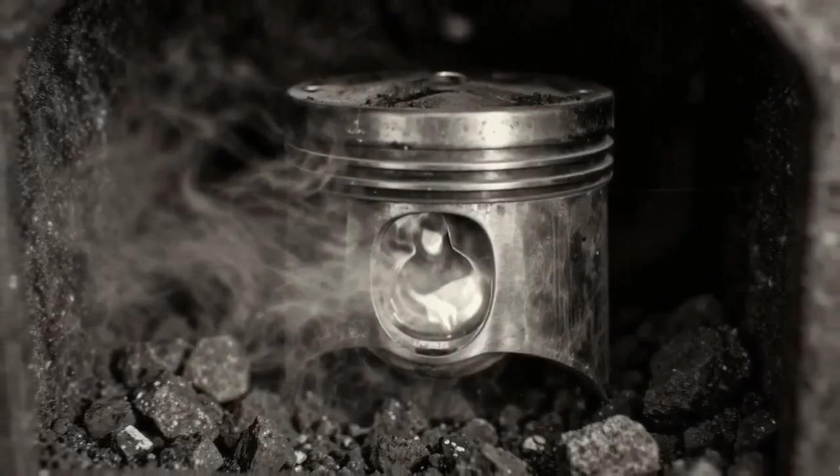Somewhere in the patent archives of the 19th century, there is a description of an engine that lit itself without a single open flame. No match, no spark, no pilot light in any conventional sense. Just a slender coil of platinum heated to a quiet, ghostly incandescence, enough to ignite a charge of vapor and air and set a piston moving.

The men who examined this machine in 1846 would have called it remarkable. Today, most people have never heard of it at all. The inventor was a New Yorker named Stuart Perry. On October 7th, 1846, the United States Patent Office granted him patent number 4800 for what the official record described

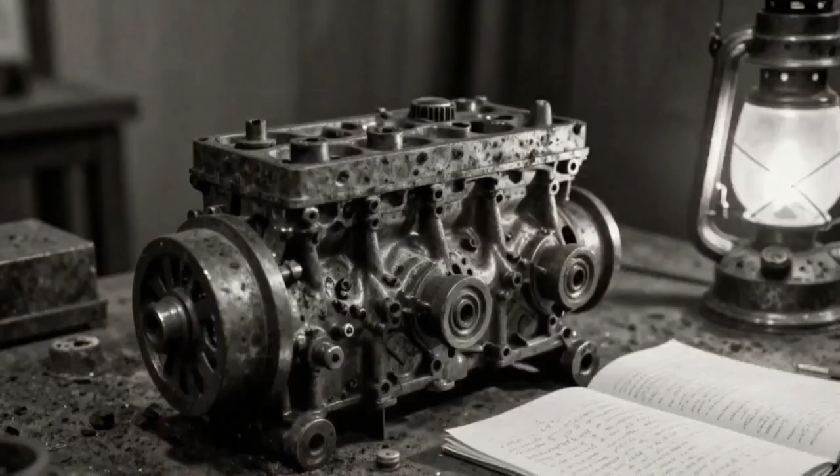as an improvement in gas engines. The language of the patent is measured and technical, the kind of careful prose that engineers of that era used when they wanted their ideas protected without being so specific that a competitor could simply read around them. But beneath the formal wording, what Perry had designed was genuinely unusual.

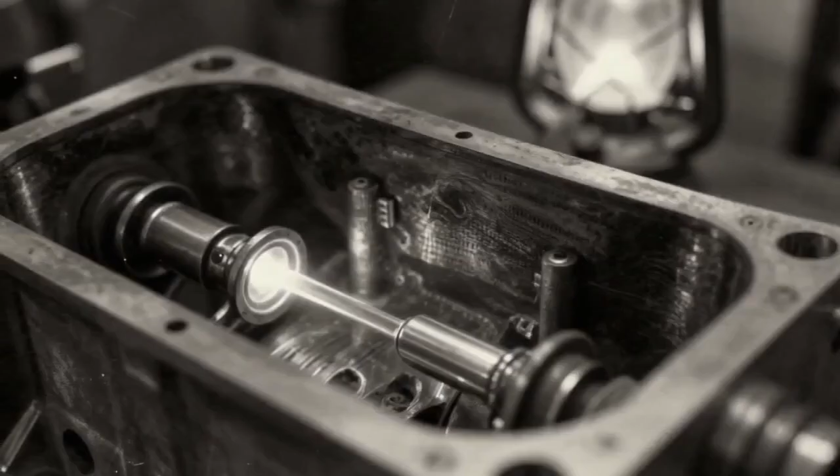A water-jacketed, double-acting horizontal engine that used vaporized fuel, mixed it with atmospheric air, and touched it off not with a naked flame, but with a piece of platinum brought to incandescence by heat alone. The result was a faint, controlled glow rather than a burning wick or an open burner, and it was enough.

It is worth pausing here to be precise about a phrase, because precision matters when the historical record is thin. The term cold light, which lends this story part of its strangeness, does not appear in Perry's original patent text. It is a modern interpretive label drawn from the scientific literature of the period that surrounded him.

Natural philosophers and early chemists in the 1840s were fascinated by the behavior of platinum, a metal capable of catalyzing combustion in surrounding gases, while itself glowing with only the faintest visible light, a phenomenon sometimes described in lectures and popular science writing as cold light to distinguish it from the roaring visible flames of ordinary combustion.

When Perry's engine is described that way today, it is because his platinum igniter fits neatly into that category of phenomenon, not because he used those words himself. The distinction matters. History has a way of acquiring labels that feel more certain than the underlying evidence actually supports.

What Perry did submit to the Patent Office, alongside his drawings and his written claims, was a physical model. This was not unusual for the time. For most of the 19th century, the United States patent system required inventors to provide working models as a condition of their applications, small, functional demonstrations, generally built to fit within a box roughly a foot in each dimension that examiners could handle, turn, and in some cases actually operate.

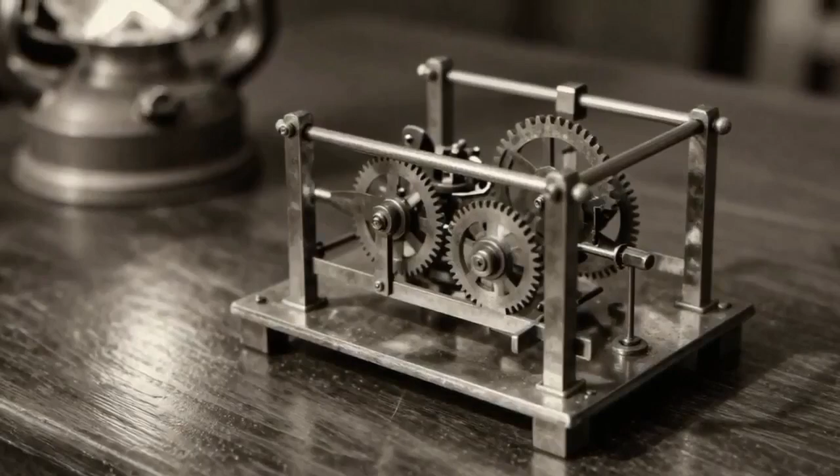The requirement existed because drawings could be misleading, claims could be vague, and a machine that worked in theory sometimes didn't work at all. A model that moved, that had correctly fitted parts, that demonstrated the basic mechanical relationships of the invention, that was evidence of a different order. It was proof of a kind of seriousness.

Perry's submitted model was logged as measuring approximately 11 inches by 27 inches by 6 inches, a compact but apparently complete representation of the engine's essential systems.

Patent office models accumulated over the decades into enormous collections, thousands of small machines lining the shelves of the patent building in Washington, and they became something of a public attraction. Citizens could walk through and see the ingenuity of their era arranged in miniature.

Some of those models eventually found their way into museum collections. Some were lost in fires. Some were sold in government auctions when storage became a problem. Perry's model made it at least as far as a 1939 Smithsonian catalog, where it was documented in the National

Museum's Mechanical Collections Bulletin as a cataloged object. And then, at some point after that entry, it appears to have quietly vanished, not destroyed in any documented sense, not transferred to any recorded location, simply gone from display, its current whereabouts unknown. That disappearance is one of the two questions at the center of this story.

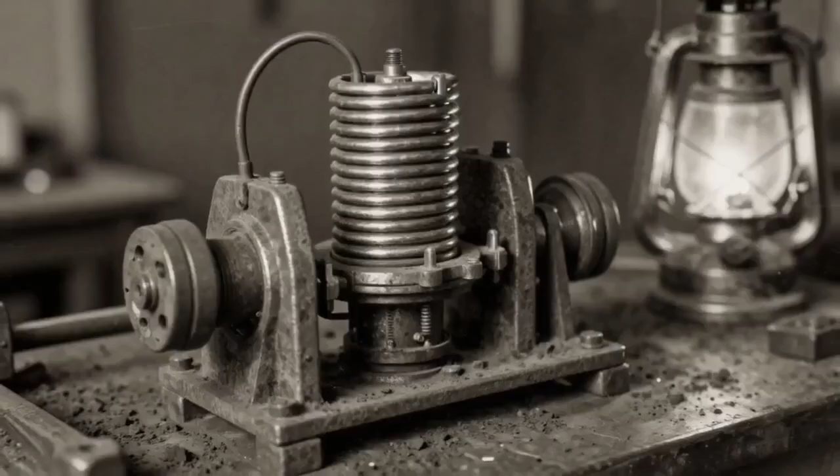The other is more fundamental. How exactly did this engine work? Perry's patent gives us the architecture, the water jacket around the cylinder, the fuel retort, the mixing of vapor and air, the platinum coil and its valve, the double-acting stroke.

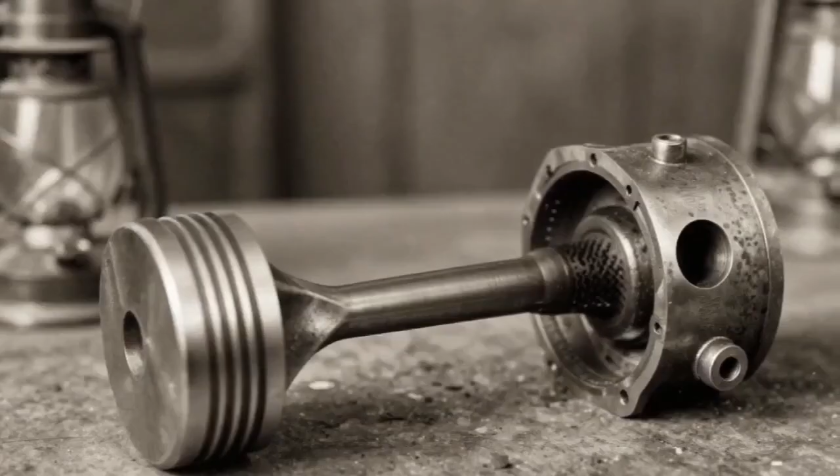But it tells us almost nothing about performance. There are no horsepower figures, no efficiency claims, no record of how long the engine ran or under what conditions it was tested. Contemporary observers who saw it noted that combustion appeared to occur over roughly a third of the piston's stroke, a detail logged and cited decades later, but beyond that the operational record is sparse.

Whether the engine was loud or quiet, whether it ran smoothly or knocked, whether Perry himself believed it had commercial promise or regarded it as an experimental step, none of that has survived in any form that can be confirmed.

What survives is the patent document and its drawings, the brief catalog entry, and the fact that the engine predates, by more than a decade, the machines that most historians identify as the founding achievements of the internal combustion era.

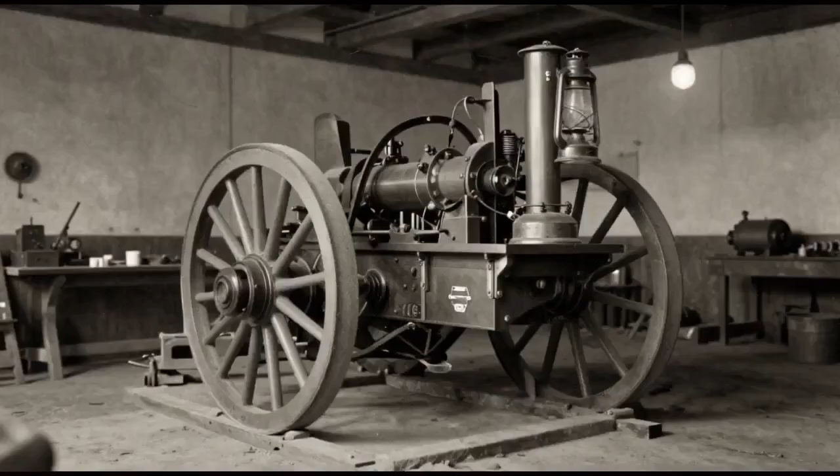The Lenoir engine, widely cited as the first commercially successful gas engine, came in 1860. Otto's work came later still.

Perry was there in 1846, building something that fits into that same lineage, quietly, in New York, with a coil of glowing platinum and a design that almost no one remembers.

Understanding why it was forgotten requires understanding first how it worked, and understanding what was lost requires reckoning with the strange fate of a small model, carefully built, once logged in a government catalog, and then gone.

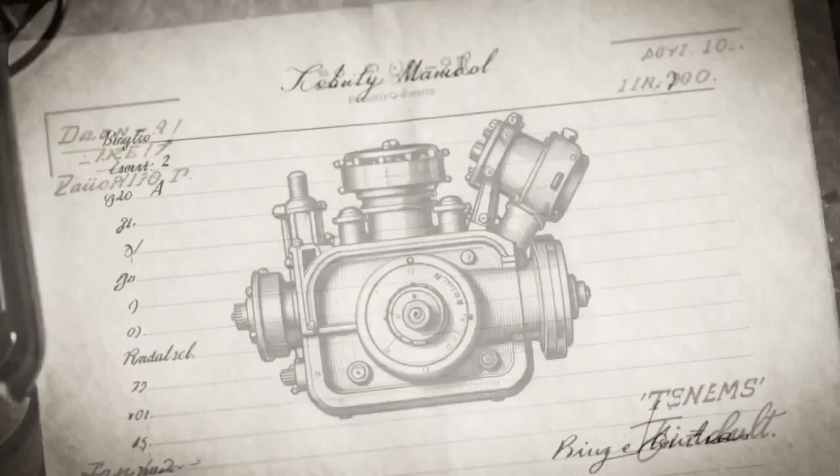The patent drawings for Perry's engine are not elaborate. They are the clean, spare diagrams of a man who understood that examiners valued clarity over artistry. A few ruled lines, some labeled parts, the kind of mechanical illustration that rewards careful study rather than casual glancing.

But if you follow those lines with patience and read the written claims alongside them, a picture assembles itself. Not a complete picture. Patent language was never intended to be a maintenance manual, but enough of one to understand what Perry believed he had built and why the design was unusual enough to warrant protecting.

Begin with the basic configuration. Perry's engine is horizontal, meaning the cylinder lies on its side rather than standing upright, which was already a meaningful choice in 1846.

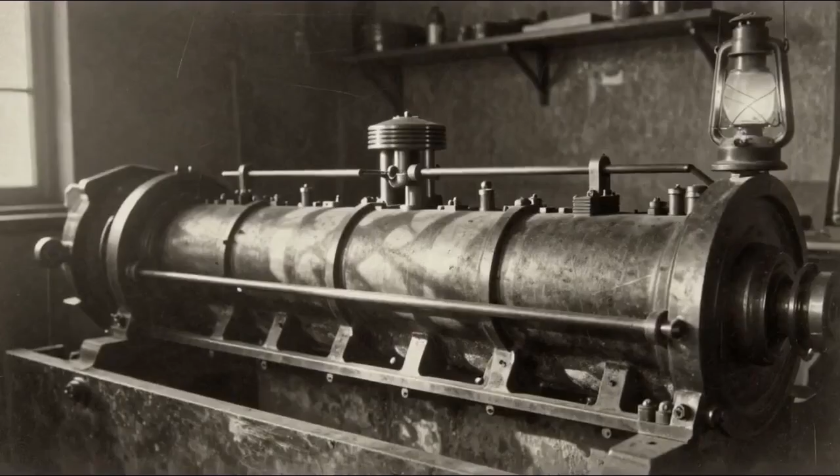Horizontal orientation tends to place less gravitational stress on a piston and its seals, and it allows for a lower, more stable machine overall. More importantly, the engine is double-acting, which means that combustion occurs on both sides of the piston alternately. The piston is pushed in one direction, then pushed back in the other, each stroke producing useful work.

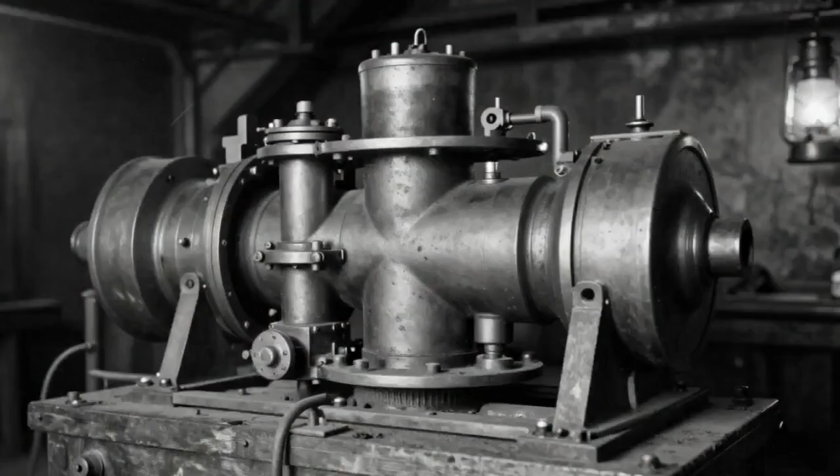This is not unusual in the history of steam engines, where double-acting cylinders had been common for decades, but applying that same logic to an internal combustion cycle was a more complicated proposition.

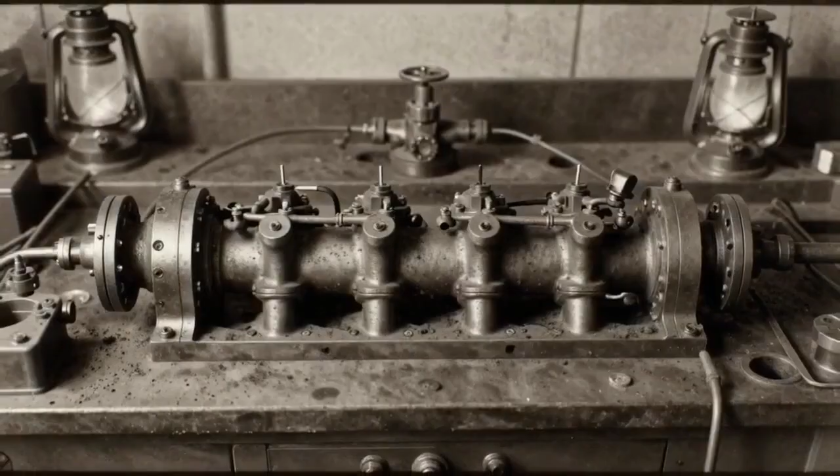You need to introduce fuel and air to both ends of the cylinder, manage ignition at both ends, and exhaust the spent gases from both sides, all in coordinated sequence. The mechanical demands are not trivial.

Wrapped around that cylinder is a water jacket. Water circulates in the space between the inner cylinder wall and an outer casing, keeping the metal from building up heat that would otherwise degrade the piston's seals, warp the bore, or cause the incoming fuel mixture to ignite prematurely.

This is, in broad outline, the same principle that governs every water-cooled engine built since. What makes Perry's arrangement more interesting is that the water does not simply cool and leave. It performs two additional functions that are built into the design as deliberate features rather than incidental effects.

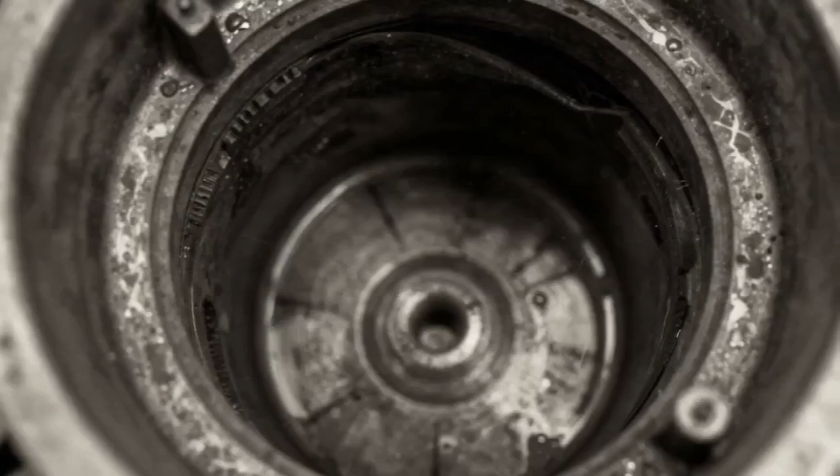The first of those additional functions is lubrication. The patent describes water being used to lubricate the piston and its rod, which would strike a modern engineer as unusual. Water is not a lubricant in any conventional sense, and introducing it to a combustion cylinder raises its own complications.

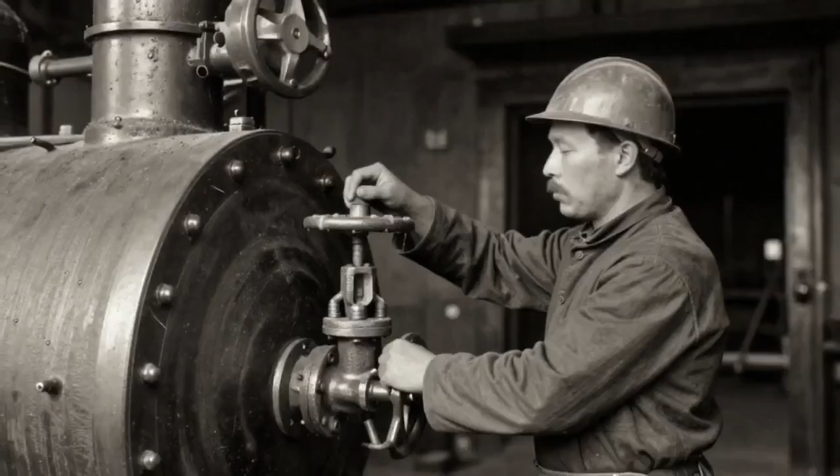But in 1846, before the development of refined petroleum oils, the options for lubricating a hot-running cylinder were limited, and Perry apparently found water's cooling properties useful enough to justify this role alongside the dedicated lubrication fluids that were available.

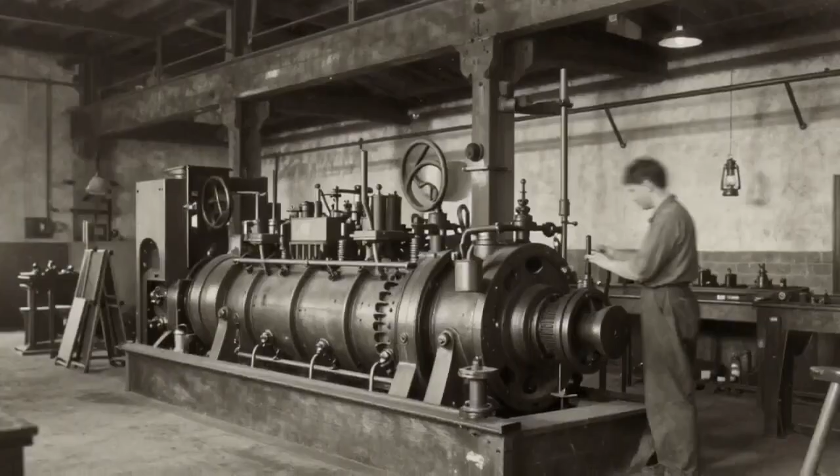Whether this arrangement worked smoothly in practice, or whether it created more problems than it solved, is not something the patent record addresses. That kind of operational knowledge, the kind that accumulates through hours of running a machine and adjusting it, was not what inventors typically documented.

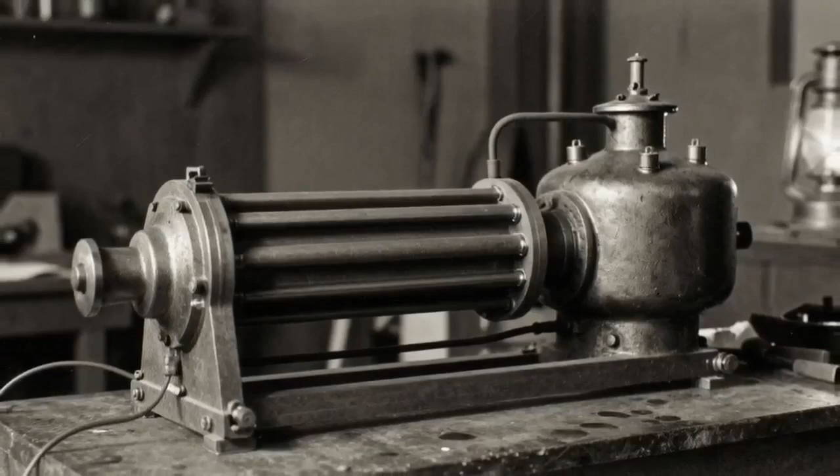The second additional function is more elegant. The same water that circulates around the cylinder is also used to heat the fuel retort.

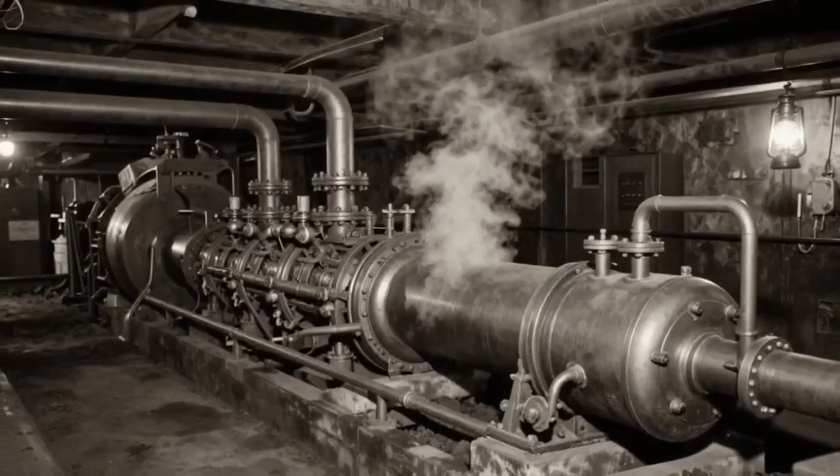The retort is a separate component, a small vessel connected to the engine's fuel system, in which a liquid fuel, turpentine is the example most often cited in connection with Perry's design, though other volatile liquids would have been candidates, is gradually vaporized into a combustible gas.

Generating vapor from liquid fuel requires heat, and rather than introducing a separate heat source for this purpose, Perry directed the engine's own cooling water, which by the time it has circulated around the cylinder has absorbed considerable heat, to serve as the heating medium for the retort.

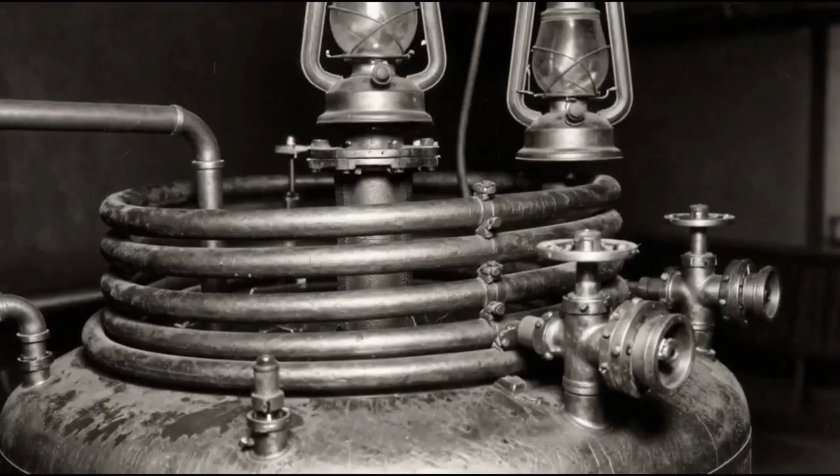The waste heat of combustion, in other words, is used to prepare the next charge of fuel. It is a heat exchange arrangement, not unlike principles that would become central to engineering efficiency a century later, and it is notable enough that it appears as the specific design claim rather than an afterthought.

Once the retort has vaporized the liquid fuel into a combustible gas, that gas does not go directly into the cylinder. It first mixes with atmospheric air in proportions that would allow it to burn properly. This mixing stage matters because fuel vapor alone, without sufficient oxygen, will not combust reliably, and too much air will dilute the mixture below its ignition threshold.

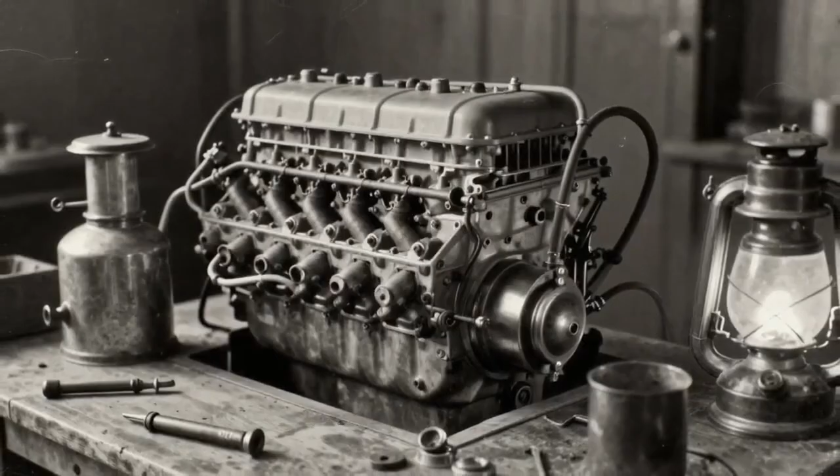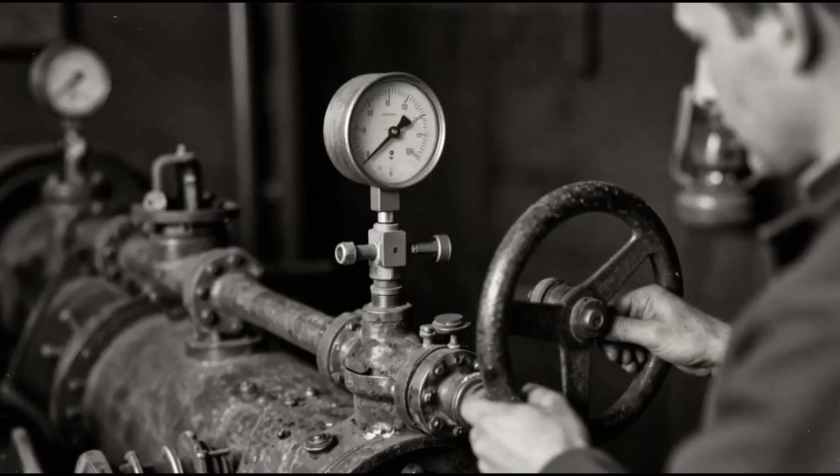Perry's patent describes this mixing as occurring before the mixture enters the cylinder, a pre-mixing arrangement conceptually closer to a carbureted engine than to the direct injection systems that came much later. The exact mechanism by which the proportions were controlled is one of the places where the patent language becomes less specific than a modern reader might wish. Some latitude was likely left to the operator's judgment or to the self-regulating tendencies of the fuel supply pressure and the valve timing. It is the ignition system that makes the engine genuinely distinctive.

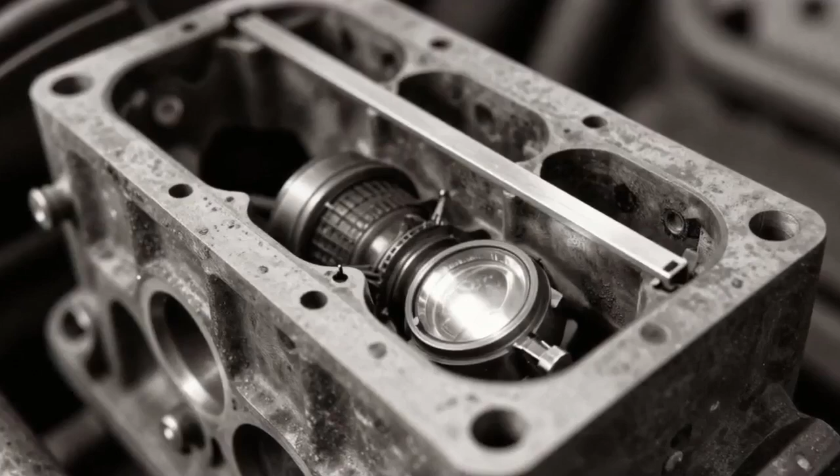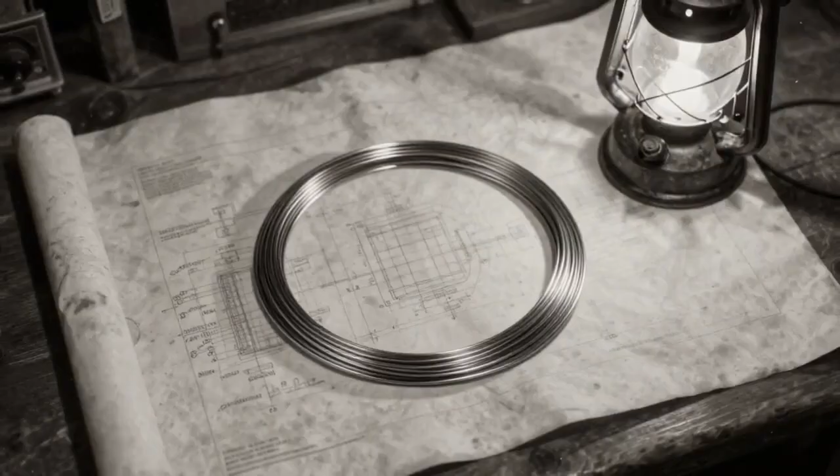Inside the cylinder, or positioned to communicate with it, is a piece of platinum, a coil or strip of the metal that has been heated to incandescence. Platinum, uniquely among the common metals of the era, is capable of acting as a catalytic surface, encouraging combustion in surrounding flammable gases while itself glowing with a faint, almost colorless light, rather than an open flame. The practical effect is that the platinum, once brought to sufficient temperature, will ignite a passing charge of fuel-air mixture without any flame being visible in the conventional sense.

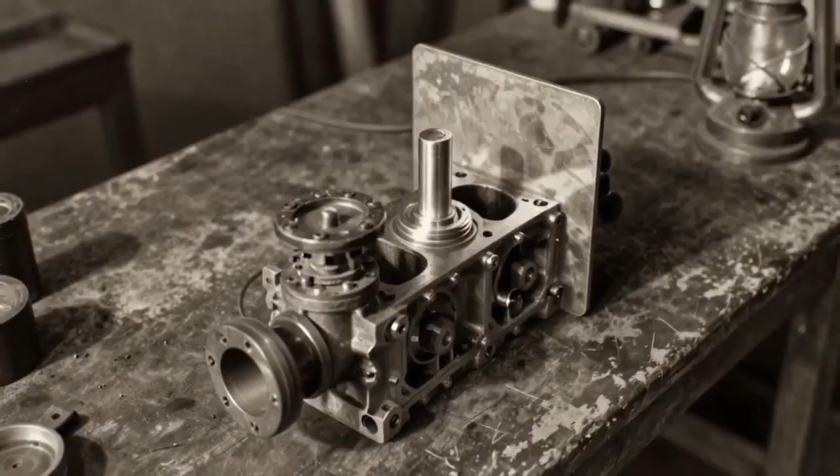A valve in the design allows the platinum to be exposed to the incoming mixture at the appropriate moment in the cycle, or isolated from it when ignition is not desired. Open the valve, the hot platinum meets the vapor-air charge, combustion begins. Close it, and the platinum is shielded while the gases are being exchanged and a new charge prepared. The timing of this valve was presumably tied to the engine's mechanical cycle, though the patent does not specify the linkage in complete detail. What the available sources do record is something about how combustion behaved once it was initiated.

The 1939 Smithsonian catalog entry, drawing on earlier documentation, notes that combustion in Perry's engine was observed to last for approximately 1/3 of the piston's stroke. This is worth considering carefully because it is one of the only operational details that survived the engine's disappearance into institutional storage. If accurate, it suggests that the burning of the fuel-air charge was not instantaneous and explosive in the way that a sharp detonation would be, but rather a more measured propagation of flame through the cylinder volume during the early portion of each stroke.

The remainder of the stroke, roughly two thirds of it, would then be driven by the expanding combustion gases as they push the piston without additional burning occurring. This kind of staged expansion, if that is what it was, would have moderated the peak pressures inside the cylinder and reduced the amount of heat transferred directly into the cylinder walls during the power stroke. Whether Perry designed this deliberately or whether it was a consequence of his ignition and fuel mixture characteristics is not something the patent explains. But the practical effect, assuming the observation is reliable, is consistent with where the water jacket may have been sufficient to keep the engine running at manageable temperatures. The cylinder was never being asked to absorb the full thermal shock of an instantaneous explosion on every stroke.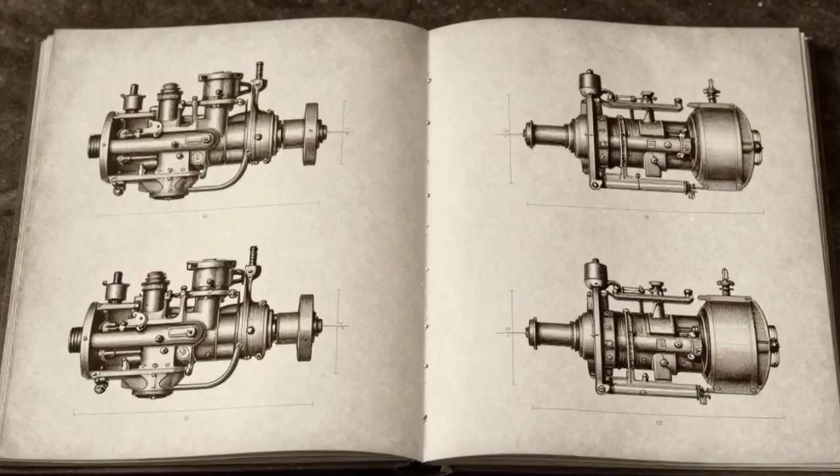This is where caution is warranted. Closed cycle is a term with specific meanings in thermodynamics and in later engine development. It can refer to systems where the working fluid is recirculated rather than exhausted, or to arrangements where combustion is isolated from the power cylinder.

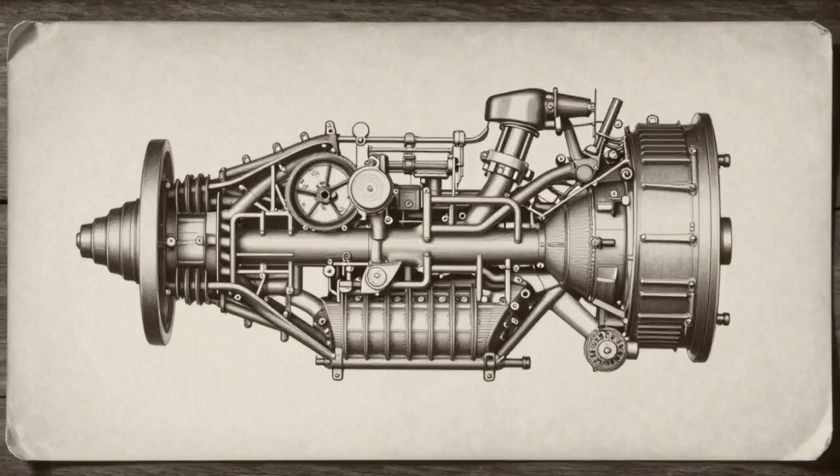Perry's patent does not describe anything so cleanly defined. He recycles heat through water, not the gases themselves. His exhaust still leaves the cylinder. To label his engine a closed-cycle design in the modern sense would be to overstate what the surviving documents support.

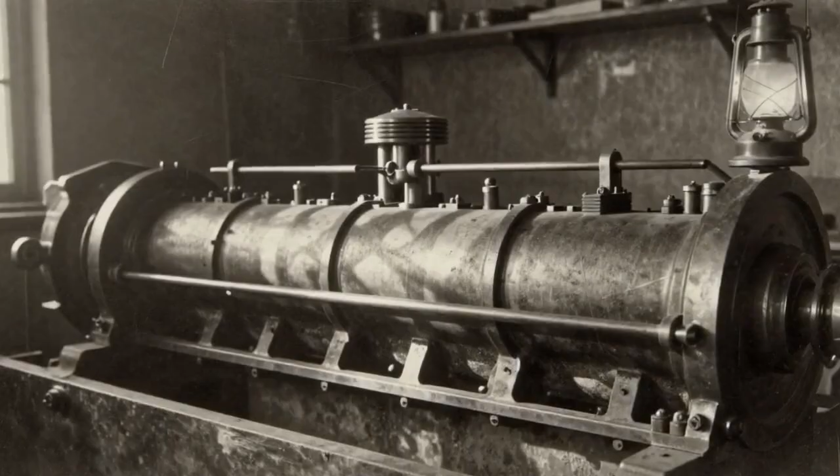The same caution applies to any suggestion of direct influence. There is no clear chain of evidence that Lenoir studied Perry or that Otto thumbed through U.S. patent number 4800 before sketching his own valve trains. Ideas in this period often surfaced in parallel, multiple inventors wrestling with similar problems, constrained by similar materials and fuels, arriving at overlapping solutions.

What we can say without having to stretch is that Perry's engine occupies an interesting position on the curve, earlier than the famous gas engines, sharing concerns that would later become central and documented in a way that allows us to reconstruct those concerns in some detail.

Part of the reason we can talk about him at all, rather than simply guessing that someone must have tried this, lies in the culture of patent models themselves.

For much of the 19th century, the United States Patent Office required inventors to submit physical models along with their drawings and claims. These models were not miniature production machines. They were proof-of-concept objects, carefully built to show the essential principle of an invention at a manageable size. A patent examiner could pick one up, trace the path of a piston with a fingertip, see how a valve was intended to move.

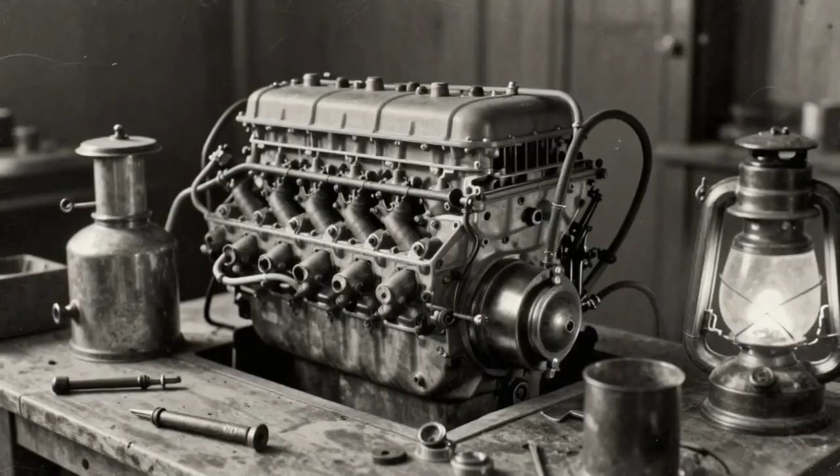For a while, the system did remember, or at least it wrote Perry's model into its ledgers. If you trace the paper trail forward from patent number 4800, you eventually leave Perry's own century. You move past the period when the patent office itself kept towering racks of little wooden and brass constructions, and into the era when those models, hundreds of thousands of them, were being culled, transferred, and selectively saved. Somewhere along that route, Stuart Perry's engine leaves the inventor's hands and becomes an object in a national collection.

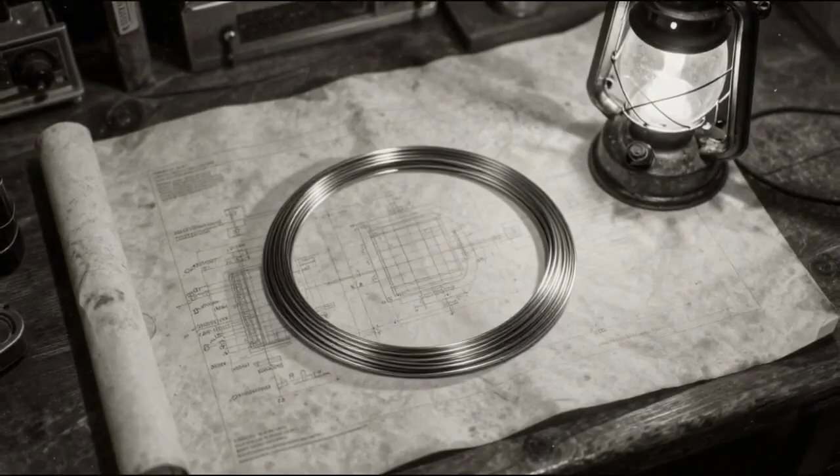The concrete clue we have is dry, bureaucratic, and oddly evocative. In 1939, the United States National Museum, what would later become part of the Smithsonian, published Bulletin 173, a catalog of its mechanical collections. Tucked among entries for pumps, turbines, textile machines, and locomotives is a listing that reads, in essence, gas engine model Stuart Perry, patented October 7th, 1846. That entry is compact, but it does more than just name an object. It gives dimensions, roughly 11 by 27 by 6 inches. It notes the double-acting horizontal cylinder, the water jacket, the use of heated platinum for ignition, and the way the waste heat from the cooling water is repurposed to vaporize fuel in a retort. It mentions that combustion continues only through about a third of the piston stroke. In other words, it is obviously describing the same architecture we have been reconstructing from the patent text itself.

Between the patent drawings and the 1939 catalog, there is no sense of a ghost. The model existed. It sat on a shelf or in a case. A curator could walk up to it, tilt it, read the old patent office number attached to its base. A staff member in the Division of Engineering thought it worth the trouble to summarize its operating principle in that bulletin.

Then the trail thins out. If you consult the modern object record for Perry's patent model at the National Museum of American History, you find a description that largely repeats the old catalog language. You get the same patent date, the same talk of a water-jacketed cylinder and platinum ignition, the same sense that this is a curiosity from the pre-Lenoir era. But you also see two telling phrases.

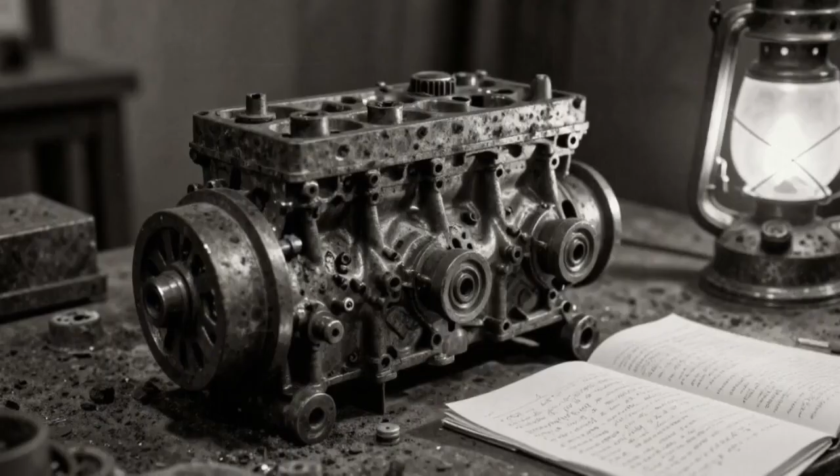The possibilities are less dramatic than theft in the night and more mundane, spread out over decades. In the late 19th century, when the Patent Office began shedding its massive model collection, tens of thousands of items were auctioned, discarded, or moved.

Fires had already destroyed large portions of the holdings. Surviving models went through multiple rounds of triage. Some were transferred to the Smithsonian, some were kept in government storage, some migrated into private hands when officials decided they were redundant or of limited educational value.

Within a museum, objects don't just sit. They are packed, unpacked, loaned, reboxed, moved from one storage building to another. Inventories are redone under new cataloging systems. Labels are updated. Classification schemes shift. A model that was once filed under experimental gas engines might a generation later be relabeled under patent models, miscellaneous, or obsolete power plants. Each of those shifts is an opportunity for a paper tag to fall off, a crate number to be miscopied, a reference to Perry S. to be shortened into something that no longer rings a bell.

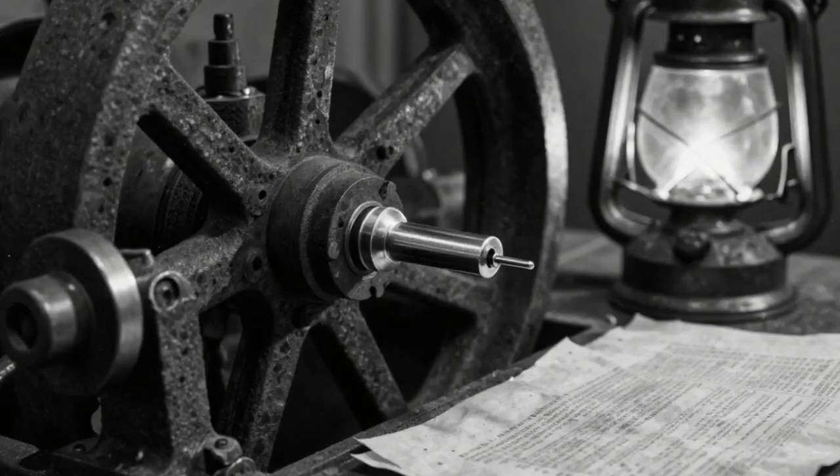Layer on top of that the disruptions of the 20th century. War years brought budget pressures and changing priorities. Collections were consolidated, sometimes hurriedly. Space was made for new acquisitions by pushing older, less understood items deeper into storage. Different divisions were reorganized. The same model might have been under the purview of the patent division in one decade, the division of engineering in another, and some broader technology and culture collection after that. In each administrative shuffle, things could be misplaced without anyone consciously deciding to lose them.

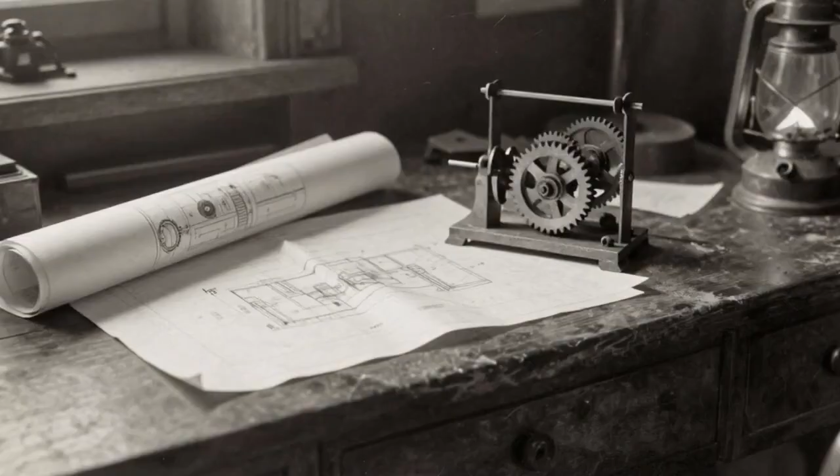There is also the less comfortable possibility that Perry's engine left federal custody altogether. When surplus or duplicate models were disposed of, some were legitimately sold or given away. Others may have drifted into private collections through more informal channels, borrowed for an exhibition that was never fully reconciled, or claimed as scrap value in an era when curatorial standards were looser. If that happened here, Perry's little double-acting cylinder might now be sitting on a shelf in someone's workshop, its original label long gone, its significance unrecognized.

None of these scenarios is exotic. They are, in fact, the ordinary story of 19th century patent models and technical artifacts. The United States once held an almost unimaginably large physical archive of invention in miniature. Fires destroyed some of it outright. Auctions scattered thousands of models to dealers and collectors. Many pieces survived, but their documentation did not. Others are beautifully documented on paper, but the corresponding wood and brass has vanished. Drawings and descriptions flowed one way, physical objects another, and the two streams do not always rejoin.

That separation matters more than it might seem. When you read a patent or a catalog entry, you encounter an invention in the tidy language its creator or curator chose. A model adds all the untidy parts back in. It shows you clearances, fastenings, the way a linkage actually has to bend to avoid another part. It can reveal shortcuts the inventor took or compromises they made when translating a diagram into hardware. For historians of engineering, those details can overturn assumptions or open new lines of questioning.

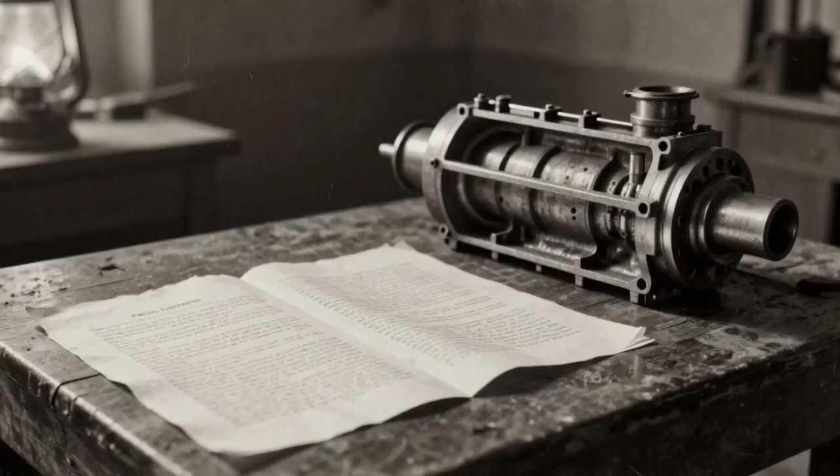In Perry's case, a rediscovered model could do exactly that. It could confirm whether his fuel retort was built as drawn or modified for practical reasons. It might show how he proposed to drive valves on a double-acting cylinder, something only sketched in the patent. Traces of wear on bearing surfaces could hint at whether the thing ever ran for more than a demonstration. Even the workmanship itself would tell us something about how seriously Perry, or the model maker he hired, regarded this engine. Was it a rough demonstrator, or a carefully finished piece intended to impress an examiner?

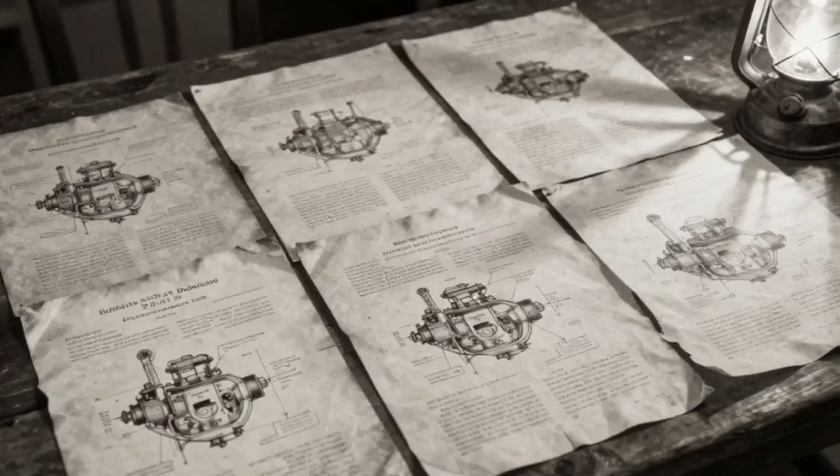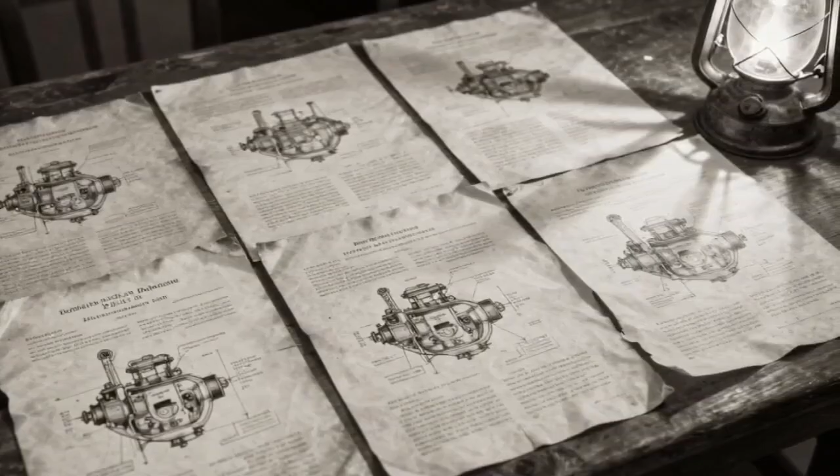Beyond the technical curiosities, there is the symbolic weight. Pulling Perry's engine out of a crate after 80 or 100 unseen years would not suddenly rewrite the history of the internal combustion engine, but it would sharpen one of its faint outlines. It would turn a paper design and a catalog paragraph back into a tangible object. That in turn might nudge more attention toward the whole pre-Lenoir, pre-Otto landscape of gas engines, an era that is often flattened into a handful of names because their machines happen to have survived in metal rather than just on paper. Instead, we are left with a gap, a patent, a paragraph from 1939, and the knowledge that somewhere along the line, an 11-inch model went missing in the maze of bureaucracy, storage racks, and human decisions.